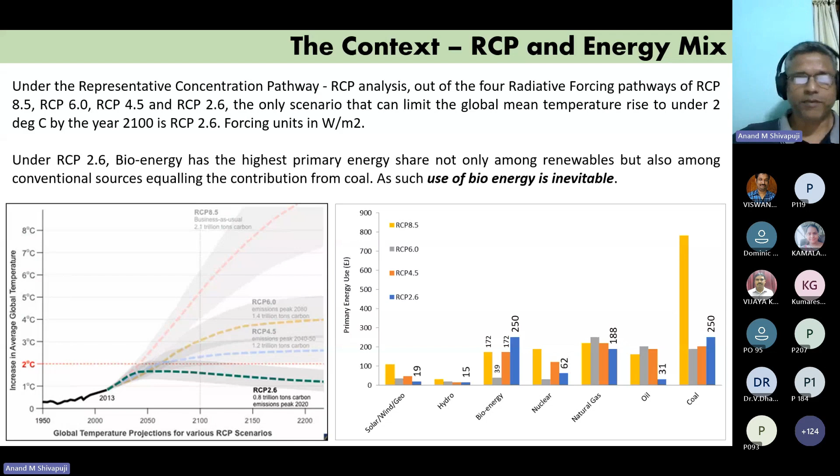Now, I have already discussed this particular concept, the representative concentration pathway, during my inaugural address. Today we will briefly touch upon that representative concentration pathway analysis, because that is going to lay the foundation for understanding why bioenergy is critical.

Recollecting some of our discussions, we have looked at 4 different representative concentration pathway possibilities or models: RCP 8.5, RCP 6, RCP 4.5, and RCP 2.6, where the numbers correspond to the forced radiative flux imposed on the atmosphere to understand how the temperature increases over the baseline. We also concluded that only if we restrict the radiative forcing to less than 2.6 watts per square meter can the global average temperature rise be restricted to less than 2 degrees. That is shown by the green line on the left side of the graph.

Now, one important outcome of this, which we briefly touched upon, is presented on the right hand side. Would like to seek your attention to the right, where we talk about the different primary energy mixes which provide the total energy requirement for the globe. Now if you look at RCP 8.5...

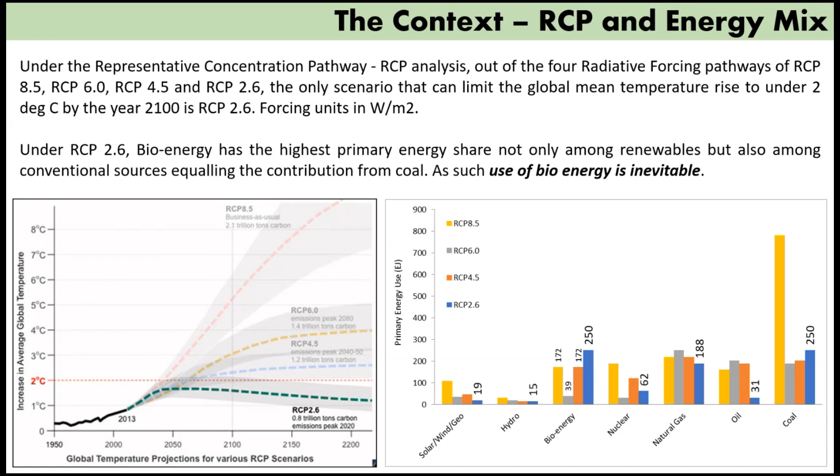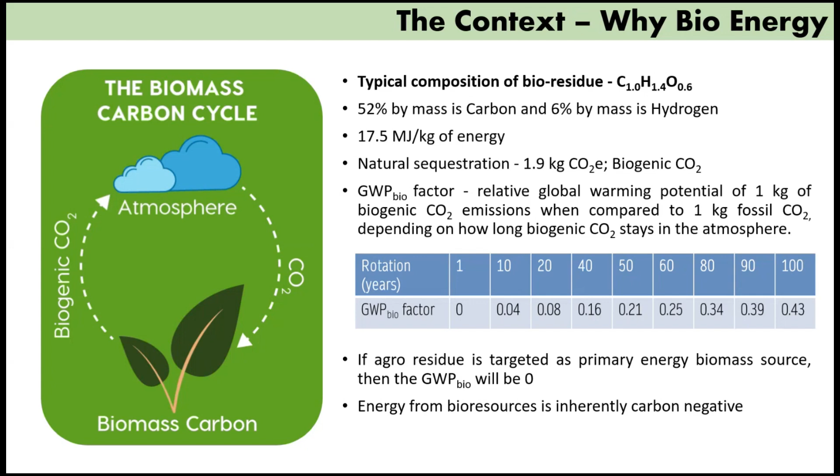That means if we grow 1 kg of biomass, then 1.9 kilograms of carbon dioxide equivalent are consumed from the atmosphere, which in turn is reflected as 520 grams of carbon in the biomass. So basically, for every kilogram of biomass grown, 520 grams of carbon, that is 1.9 kilograms of carbon dioxide, is consumed from the atmosphere. So every time we grow biomass or a tree, carbon dioxide is removed from the atmosphere, and reflecting back to my talk on the first day, the concentration of carbon dioxide in the atmosphere can come down.

So that is the key feature of biomass. If you grow biomass, carbon dioxide from the atmosphere will be removed, leading to reduction in the greenhouse effect and, in turn, reduction in global warming. That is the beauty of biomass-based energy, that is bioenergy, because every time you grow biomass, you are taking out carbon dioxide from the atmosphere before releasing it back. So the net carbon dioxide emission into the atmosphere will be zero, while also giving you the necessary energy for the livelihood of human beings.

Now, how can we make use of biomass or bioenergy? What are the different routes of using bioenergy? Bioenergy can be used through two different routes: one is the thermochemical route, the other is the biochemical route. The biochemical route is pretty simple to understand, wherein we allow biomass to undergo typically anaerobic digestion.

When anaerobic digestion of biomass takes place, it leads to release of methane into the atmosphere. This methane can be captured through appropriate technology known as biomass digesters, and then this methane can in turn be used for energy purposes.

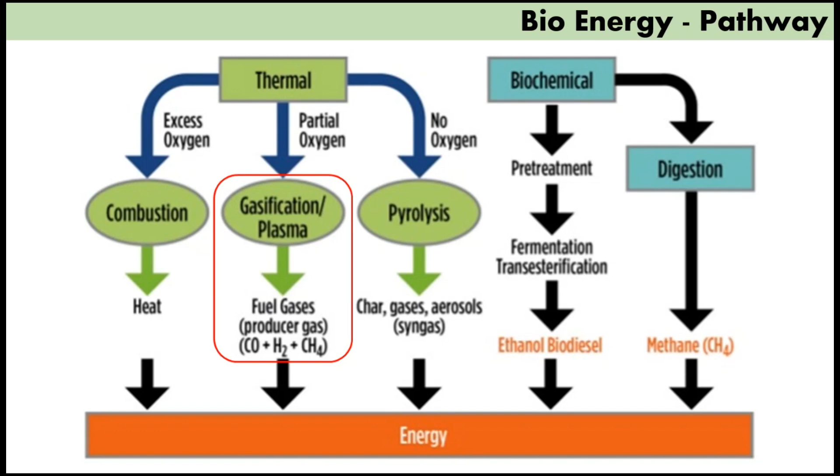Basically, this process is called biomass gasification. In gasification, we are converting biomass into a mixture of gaseous combustible compounds. Hydrogen, carbon monoxide, and methane are all gaseous combustible components. So gasification is a process wherein we convert solid biomass into a mixture of gaseous combustible compounds containing carbon monoxide, hydrogen, and methane.

Now this process I am representing in the form of a stoichiometric equation, as evident in this slide. The title of the slide is bioresidue gasification. In the combustion process, you can see that the total air required for completely burning the biomass is approximately 6 kilograms, which would be required to completely convert the biomass into products of combustion. Now here you can see the equation.

C1H1.4 with 1.05 moles of O2 plus 3.76 N2 together comes to 6 kilograms. This will give carbon dioxide, nitrogen, and some water. I have marked carbon dioxide and nitrogen both in blue color because they are products of combustion and don't contain any calorific value. But this process will generate a lot of heat, and this heat can be used for any thermal application, like cooking food or any industrial heat requirement purpose.

Now, if we have a combustion process and we decrease the air supply, then what happens is we go from combustion to gasification, as you can see in the bottom equation. It generates hydrogen, carbon monoxide, and methane in the fraction of 20% hydrogen, 20% carbon monoxide, and 2% methane. One important factor to understand here is in combustion we give 6 kilograms of air for every kg of biomass, but in gasification we give only between 1.5 to 1.8 kilograms of air for every kg of biomass. That basically means we are reducing the amount of air supplied for the conversion process.

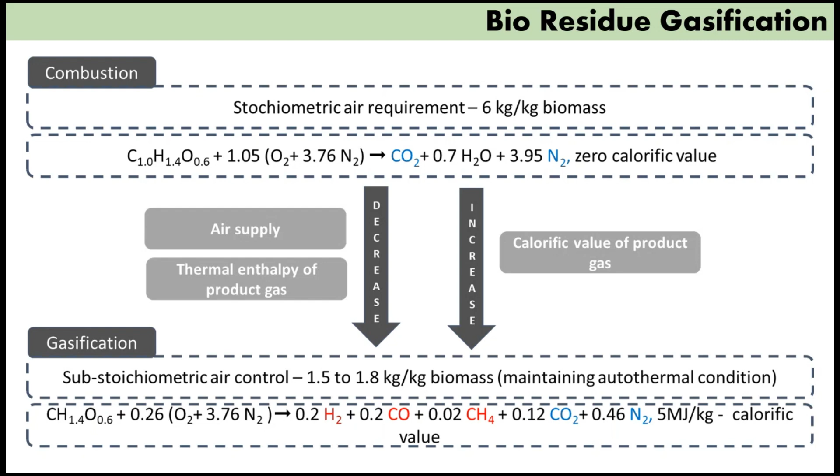What is important is that in combustion, the products of combustion have 0 calorific value, but in gasification, the products of combustion have 5 megajoules per kg calorific value. The calorific value contained in the gas is 5 megajoules per kg.

Now I am on the next slide where I am describing the process of gasification. I hope this slide is visible. Somebody can confirm, please. Yes, sir. Okay, thank you.

This particular slide is the typical representative diagram for gasification. On the left side, let me pull out the pointer. On the left side, here, you can see there is a reactor which is called the gasification reactor. This gasification reactor is basically a cylindrical element.

It's a cylindrical element where air is drawn from the top as well as from the sides. Biomass is given from the top, and from the side air nozzles we ignite the biomass that is introduced into the system. Then this reactor is set under negative pressure by means of a blower. The moment the blower is started, it will start sucking the gas from this reactor, and because of this suction, air will enter from the top as well as from the sides, supporting the combustion.

What is important here is that even though the reactor is open from the top as well as from the sides, only between 1.5 to 1.8 kg of air goes in for every kilogram of biomass.

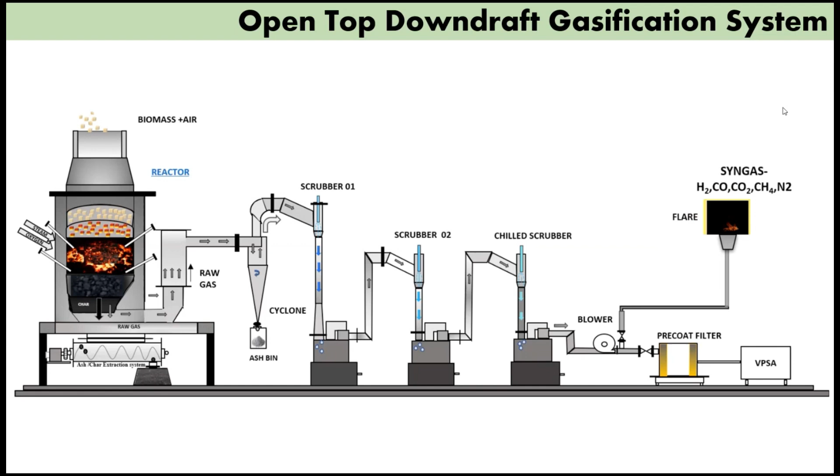This gasification system can receive any type of biomass, which is why it's called a feed agnostic system. For example, palm frond, coconut shell, bagasse, banana leaves, bamboo, wood chips, or any typical biomass found in the country or anywhere else can be used as fuel for this gasification system.

The only requirement is that loose biomass cannot be used directly for gasification. It must first be converted into briquettes before being subjected to the gasification process.

These briquettes must meet certain quality specifications. One key requirement is that ash content should be less than 10%, moisture content should be less than 10%, particle density should be around 750 kg per cubic meter, and bulk density should be around 350 kg per cubic meter.

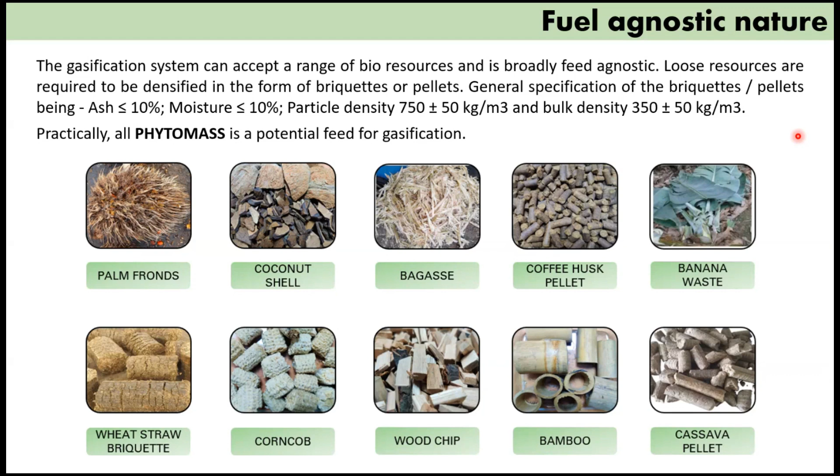So take any biomass available across the globe, convert it into briquettes meeting these specifications, and it can then be used for the gasification process.

Earlier I indicated that the gasification process generates 20% hydrogen, 20% carbon monoxide, and 2% methane. Now suppose you want to increase the concentration of hydrogen generated. What should be done?

Every kg of biomass requires about 1.5 kg of air for gasification. If you look at this 1.5 kg of air, every kg of air contains about 230 grams of oxygen and approximately 770 grams of nitrogen.

In the gasification process, only oxygen takes part in the chemical reaction; nitrogen doesn't. So instead of sending air, for every kg of biomass we can send only oxygen. Since every kg of air contains 230 grams oxygen, but we send 1.5 kg of air per kg of biomass, that means for every kg of biomass we're sending approximately 350 grams of oxygen.

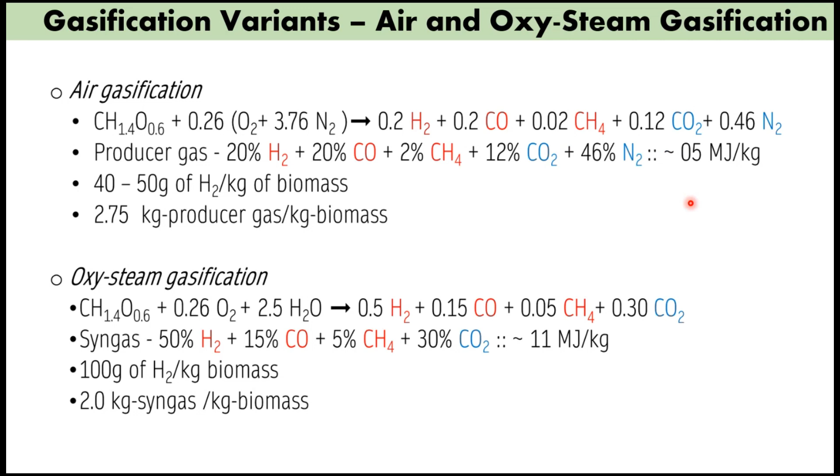Because of this, the hydrogen concentration increased by 2.5 times, and the calorific value of the gas increased by more than 100%. Now I am giving some typical statistics here comparing air gasification against oxy-steam gasification - you can take a look at it.

Every kg of biomass requires approximately 1.6 kg of air, and the electricity required for operating the gasification system is about 0.1 unit. So for every kg of biomass, you require only 0.1 unit of electricity, and this will produce 2.55 kilograms of producer gas. Each kg of that producer gas has got 5 megajoules of energy. So that is the gas composition I'm showing here, along with the gas calorific value.

When we move from air to oxy-steam gasification, the same 1 kg of biomass will consume the following units of oxygen, generating 1.4 kilograms of syngas.

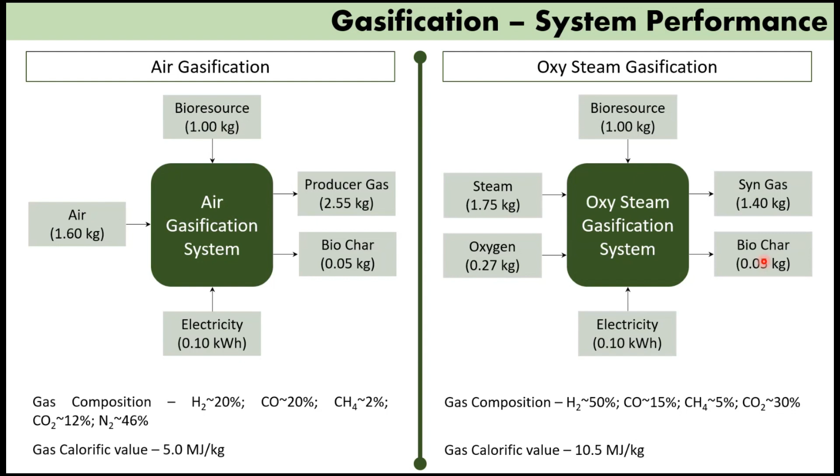This producer gas can be sent into an industrial burner wherein you generate thermal energy for any industrial applications. These applications can be for heat treatment process, biscuit baking process, tea drying process, cooking food at industrial scale, or any such thing. So any application, even for boilers—anywhere thermal energy is required, this gas can be used.

Now, the same gas can also be used for electricity generation. This is the most important thing, please. Electricity generation is possible using pure 100% gas engines like natural gas engines, or you can operate a diesel engine in dual fuel mode, wherein producer gas becomes the primary energy source and diesel becomes only the secondary energy source or pilot fuel. So this air gasification system can give you bioenergy in the form of bioelectricity or biothermal energy.

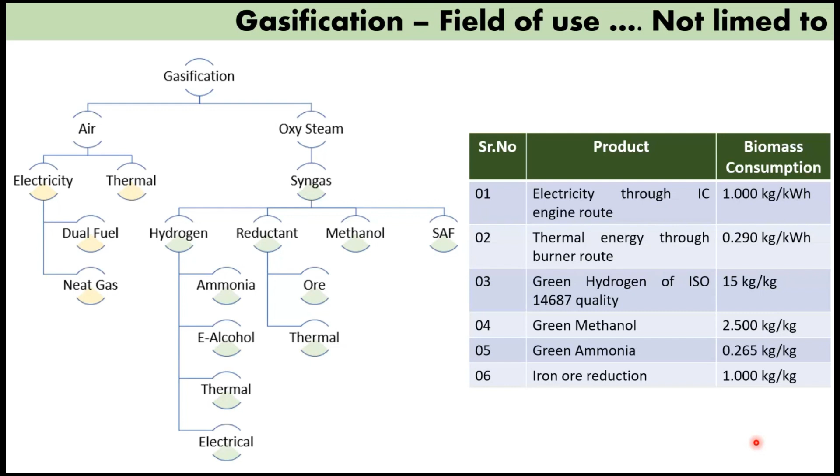Similarly, if you want 1 kg of green hydrogen, we require 15 kg of biomass. Every kg of green methanol will require about 2.5 kg of biomass. Similarly, 1 kg of biomass can give almost 4 kilograms of ammonia. And every kg of biomass can lead to reduction of 1 kg of iron ore.

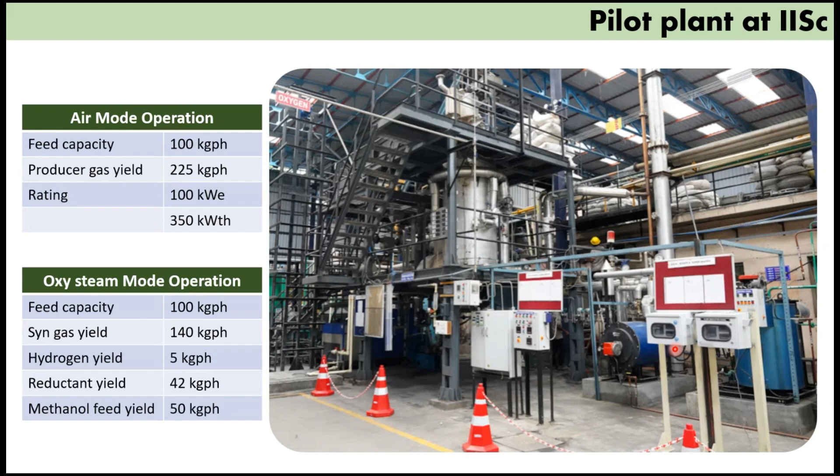The same system, when operated in oxy steam mode, again consumes 100 kilograms of biomass every hour. It generates 140 kilograms of syngas per hour. From this, we get between 5 to 6 kg of green hydrogen, or we can generate 50 kilograms of methanol, or 42 kilograms of reductant. The same plant can be operated in any of the modes.

This vacuum pressure swing adsorption system is basically a filtration system which acts like a filter for separating hydrogen from all other gases. This VPSA contains multiple towers, and these towers contain what are called zeolites, which are essentially small pebbles with very high surface area, coated with a certain proprietary material.

This material is something we don't develop at IISc. We purchase it from either Arkema in France or Honeywell Corporation, and we fill these towers with that particular bed material.

When we supply syngas at high pressure into these columns, carbon monoxide, methane, and carbon dioxide get adsorbed by the bed material, and only hydrogen is released from the top of the column. All other gases are absorbed or retained, and hydrogen is released from the top. This process continues to happen cyclically, and by means of proper control of the cycle, we continuously generate ultra high pure hydrogen.

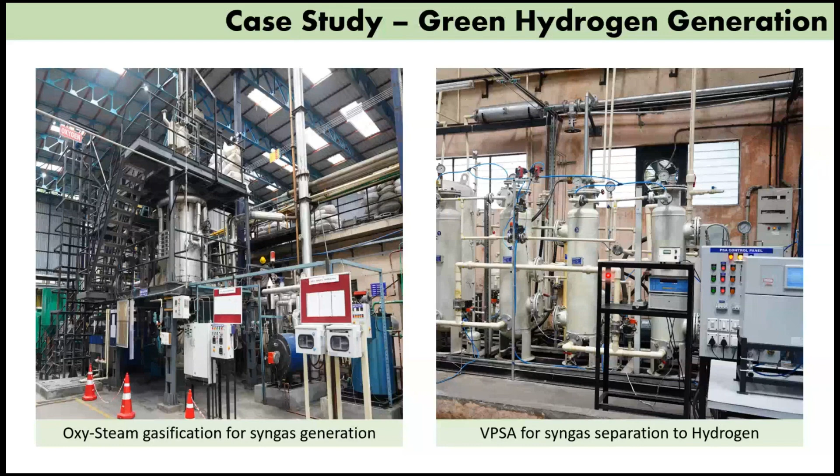Now using this biomass gasification system and the VPSA system, today at IISc we are in a position to generate green hydrogen, which is of proton exchange membrane fuel cell quality.

For example, the hydrogen that is generated cannot contain moisture more than 5 ppm. Similarly, it cannot contain methane more than 100 ppm. Carbon monoxide concentration is limited to less than 200 ppb, or 0.2 ppm. Similarly, the sulfur compound should be less than 4 ppb. So on and so forth, the ISO 14687 establishes a very stringent quality requirement.

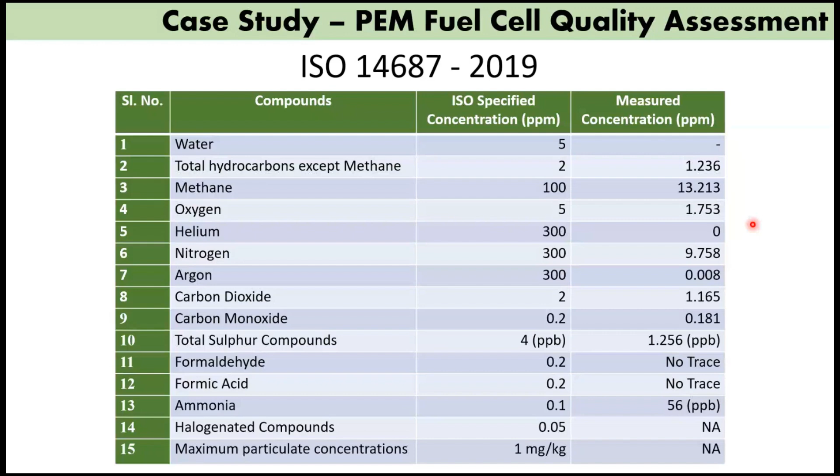What this basically means is that the gas we have generated in the lab at IISc using the oxysteam gasification process and the VPSA based process is hydrogen of PEM fuel cell quality. So we have been able to generate hydrogen of PEM fuel cell quality.

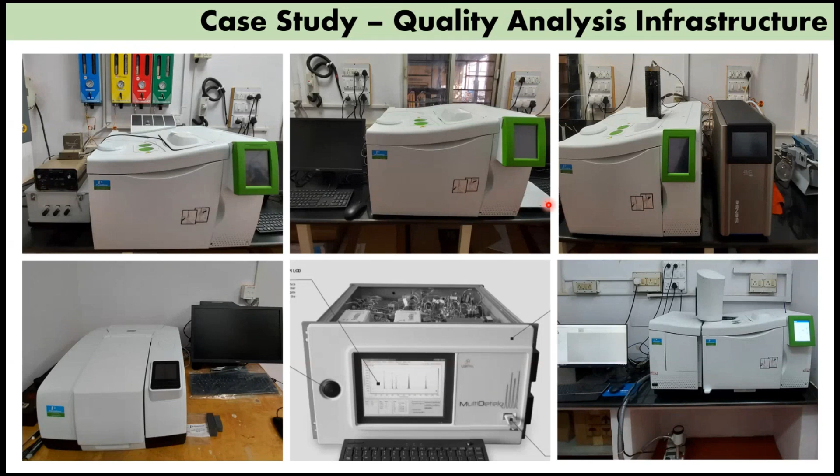The left bottom corner is what is called a Fourier transform infrared spectroscope, used for measuring compounds like aldehydes and so on. In the middle, we have a plasma emission based detection system, and on the right side is a typical GC-TCD with an autosampler. So a range of infrastructure is required to even measure the quality of the hydrogen that is generated.

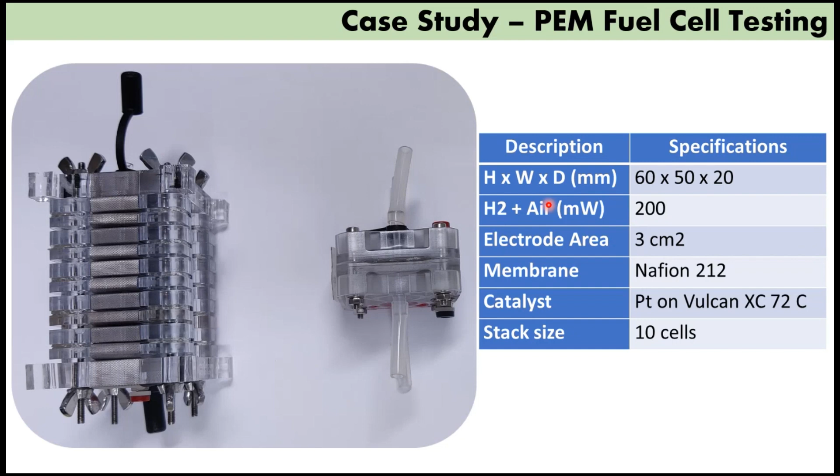Now the hydrogen that has been generated has been passed through a proton exchange membrane fuel cell stack as shown in the figure here. It is a typical PEM fuel cell stack which we purchased from Fuel Cell Store. On the right hand side you can see the specifications, and we have created a test setup for loading the fuel cell.

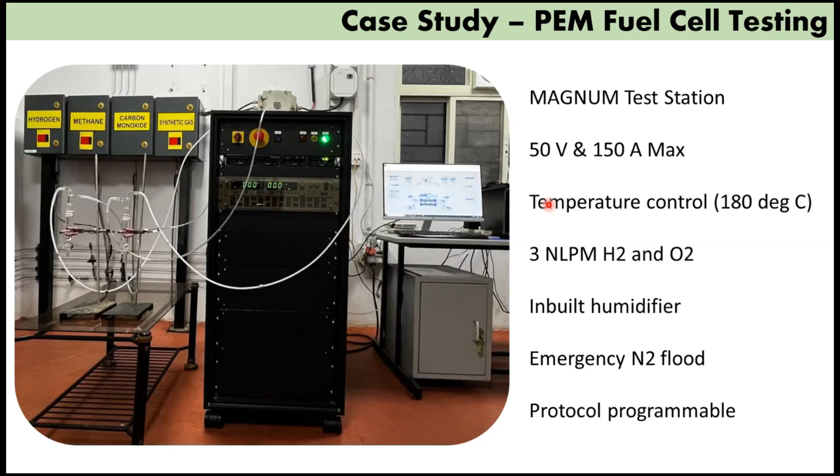Okay, now this is a test station which applies impedance to the proton exchange membrane fuel cells, enabling drawing of current. The PEM fuel cell starts operating in open circuit mode. Then gradually, as we start decreasing the resistance, the current drawn also will start increasing. So this is the test station from Germany which is used to test the proton exchange membrane fuel cells.

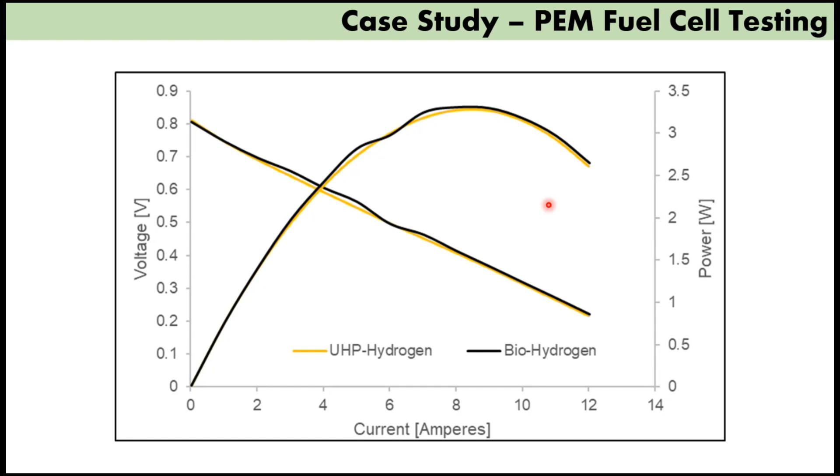Now, as a part of project with Indian Oil Corporation, one such facility of generating biohydrogen will be deployed in New Delhi, and the hydrogen generated from that will be used for operating buses using PEM fuel cell.

Now, while everyone talks about green hydrogen, one important factor to understand is that as per the Government of India definition, any hydrogen generation methodology with effective or equivalent carbon dioxide emission of less than 2 kilograms will qualify as green hydrogen. I repeat, any method that has carbon dioxide intensity of less than 2 kilograms of CO2 equivalent per kg of hydrogen generated will qualify as green hydrogen.

Now look at the carbon intensity of this method. It is only 0.91 kg of carbon dioxide equivalent per kg of hydrogen generated. This number has been arrived at by considering both direct and indirect emissions. Direct emission is the emission of carbon dioxide because of consumption of biomass. Indirect emission is the emission of carbon dioxide because of the electricity used for operating the gasifier and the VPSA, as well as transporting the biomass from up to a 40-kilometer radius to a centralized location. So basically, the number 0.91 includes both scope 1 and scope 2 emissions of carbon dioxide.

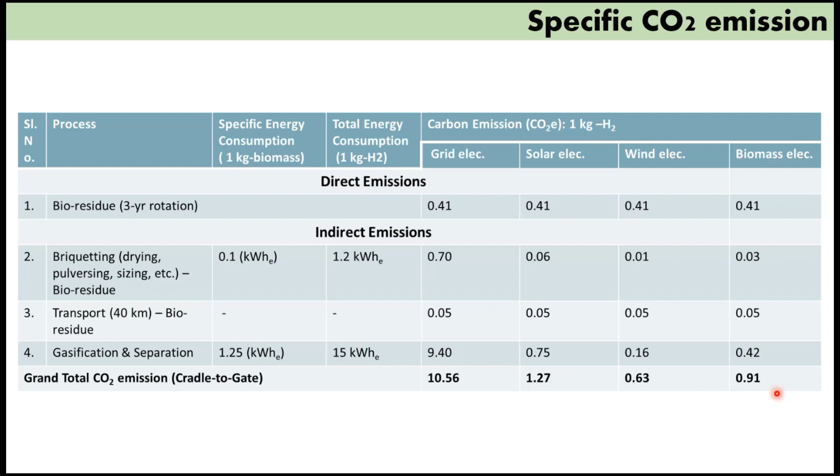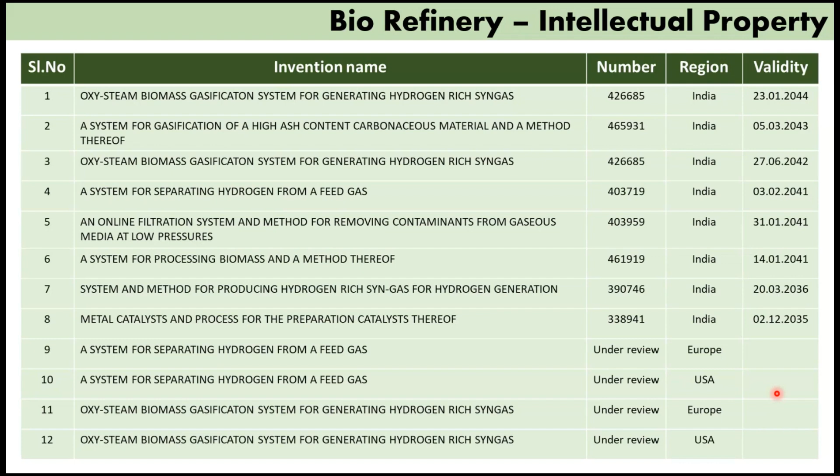So in essence, the hydrogen generated from the biomass based route qualifies as green hydrogen as per the Government of India norms. Now, finally, at Indian Institute of Science, we have claimed almost 12 patents for a variety of intermittent technologies associated with this biomass-based gasification system, as well as the vacuum pressure swing adsorption system for generation of green hydrogen. With this, I would like to close my presentation, and would be open to questions. Thank you so very much.

Rani from Government Engineering College, Dahod, Gujarat: So I wanted to know about the latest innovation in hydrogen storage, especially as concerns hydrogen. One of the major issues that may arise is storing, or in terms of transportation. So which are the newer trends in storing?

The challenge here is compression of hydrogen is very difficult - not technologically difficult, but challenging from the point of view of energy consumption. Every kg of hydrogen has 121 megajoules of energy, and almost 12 megajoules of energy will get consumed if we use the compression route for storing hydrogen at 700 bar. So compression of hydrogen is challenging, but compressed hydrogen storage is the simplest and most technologically advanced method. That is currently being used even for dispensing hydrogen.